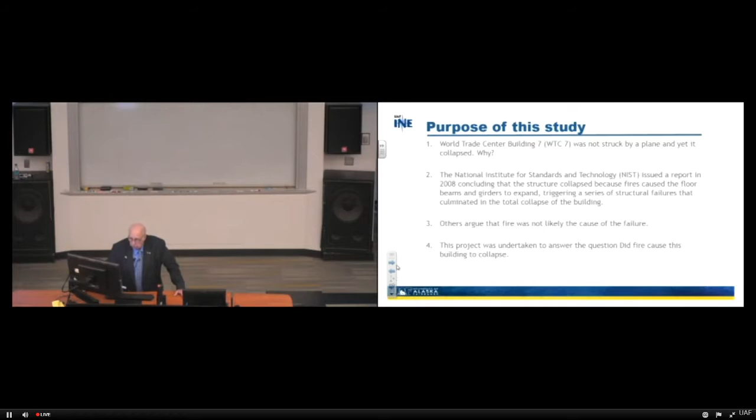Today I want to share the methodology with you. We first assembled the available documents, erection drawings, etc. that were available for this project, for this building. Traditionally, I would have liked the opportunity to go in and pick up all the pieces of the puzzle and put it back together like a typical airplane, but they did not exist, it wasn't available. So we did the best we could with all available documents, and basically created an AutoCAD drawing used to create a virtual geometry of this 47-story building. In digital form, you should be able to see every piece, every puzzle, every member, and it should look exactly like what was used in that structure. So that's what we did.

We then prepared an Abaqus nonlinear computer model for the connections and framing of this building. That's a fairly sophisticated finite element program available that enables you to look in detail at how something will respond under a set of conditions. I know I have a mixed audience here, so I'll try to keep it simple, while also sharing some pieces of complexity so those in the technical arena can appreciate that we looked at this in a fairly sophisticated way. There are several things here I haven't talked about.

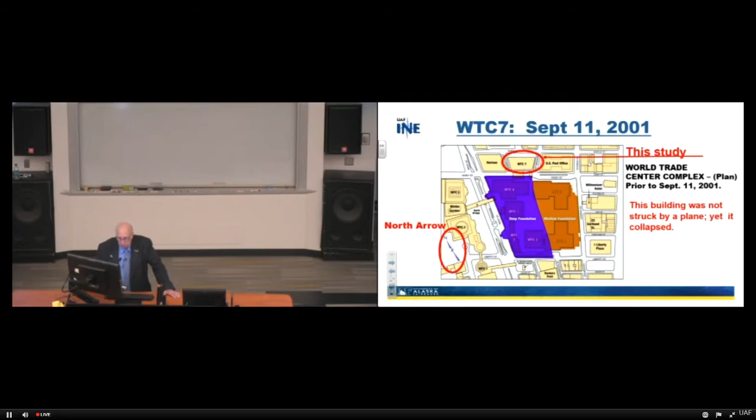If we're looking at it from an elevation view and take a look at the various sides of this building and what it may have looked like, here's the north elevation, the width. Notice it's wider trapezoidally than the south elevation. So the building is not symmetric, for God's sake, there's all kinds of issues, but this makes it really interesting. And here's that width.

Here's the south, notice it's not as wide. And then here's the west elevation and the east elevation.

Within that context, here's floor 13, because that's where we're going to spend a lot of time, so you'll have some understanding of what's going on in that area. Here are these perimeter trusses I was telling you about, at floor 5, 7, 24 and 22. Those trusses are resisting lateral loads.

In the plan view you see A, C, D and so forth, there's that building in plan view. Down below here is the Con Edison substation, shipping, and so forth, all the things going on down there. Okay, so that's what it's built on, that's what it looks like, that's what we're dealing with. Way more complex than that.

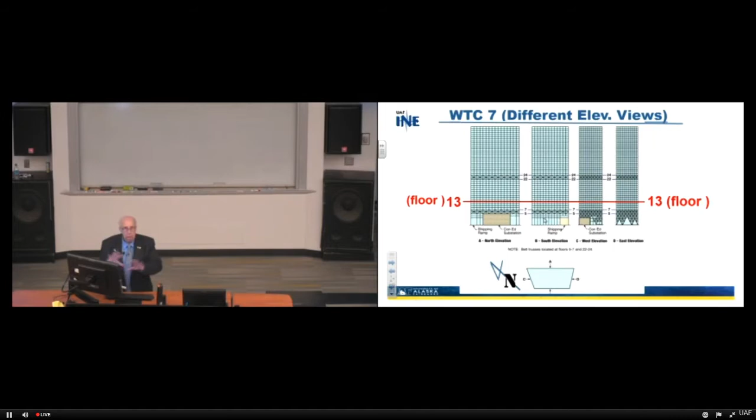Because column 79, just to give you a snapshot of where we're heading, column 79 is basically what they said failed to bring this building down. So we're going to go there and take a look at it, and we're going to look at it intensively.

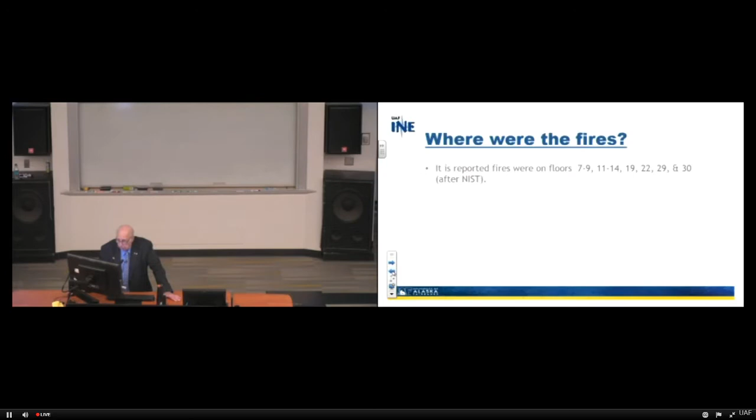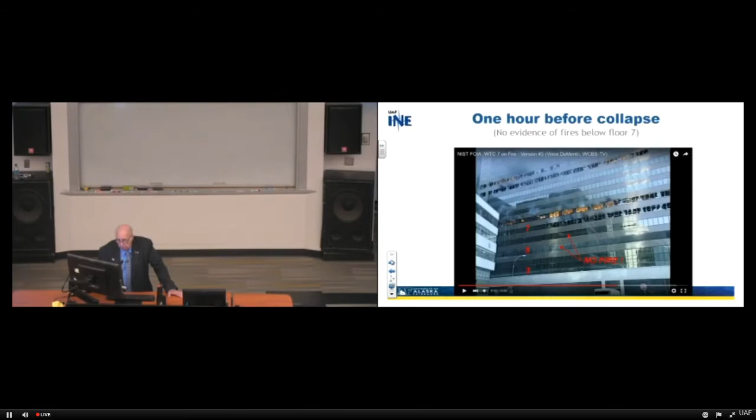All right, so now moving on with that idea in mind. We've got all that beautiful thing captured in our minds. We're ready to go. So there were no shear studs installed on the building girders.

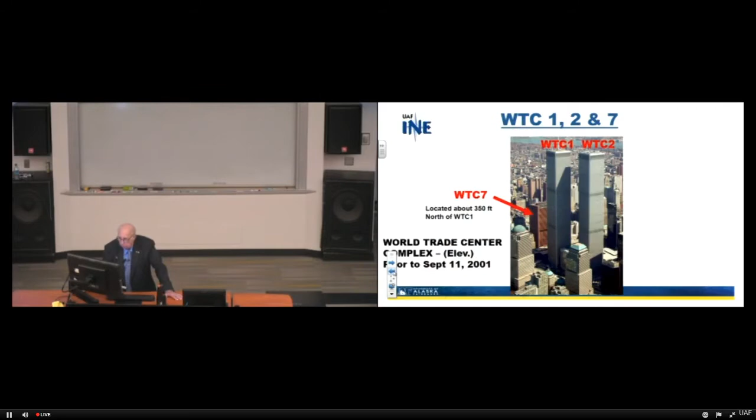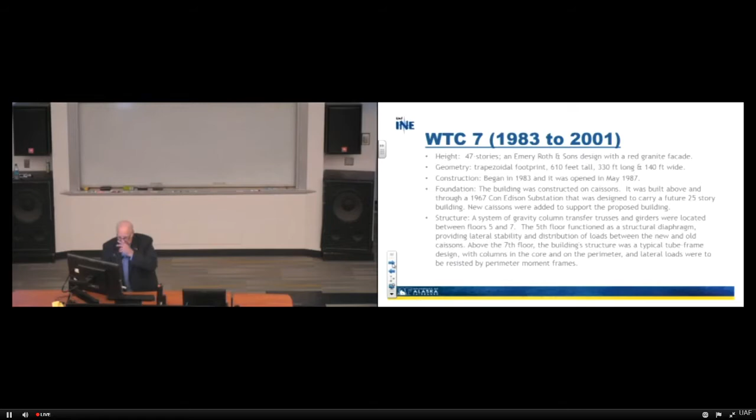Okay, so... going backwards here or something. Hang on a second, I'm going crazy. Too much fun, all right.

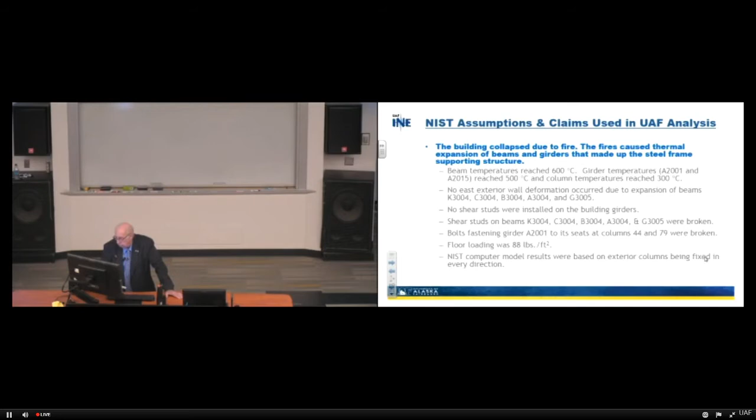So they've lost those supports. That means those two columns no longer have lateral support at that level, and did they possibly have a problem later? The floor loading was 88 pounds per square foot. The NIST computer model results were based on exterior columns being fixed in every direction. That's kind of a significant thought.

So now, looking at their plans — this came out of the NIST report on page 343, 2008 — this gives you a geometry, that's a 45-foot length from column 44 to 79. That's a girder length, 45 feet, that's longer than this for sure. You see what I'm saying? That's not small. This is a huge building, 600 feet across.

I mean, for God's sake. So here is 50-some feet here, 54 feet across. This is our exterior wall. I'm in the northeast corner of this building. Is that clear to everybody? Here we are in that trapezoid world.

Notice that there's asymmetric framing. These beams, those beams, for God's sake, are 52 feet long. That's not small. I mean, where in the world do you see that kind of stuff?

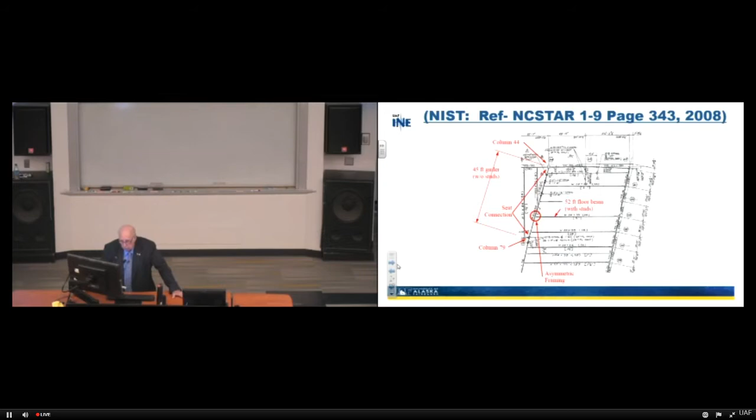So anyway, in their view, by taking a heat model, putting fire on it and then subjecting their finite element model to an increase in temperature, they got a thermal expansion. Their thermal expansion looks like this — that actually is this girder right here, A2001. It expanded, and they said it pushed off of this bearing seat, and thereby they lost support.

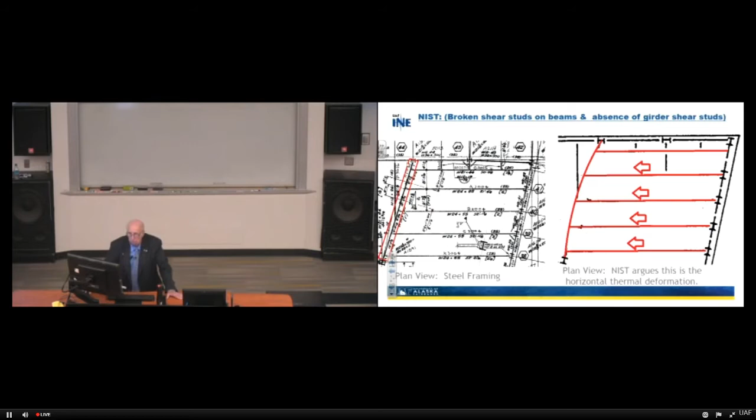And then these cascaded downward. Okay, so that's basically what we're talking about here. There's that girder I'm talking about, there's that exterior, and here are lateral supports for this beam system through here.

So what were their conclusions? First of all, their fire-induced weakening of critical columns did not cause WTC7 to collapse — didn't get hot enough. They're saying that 300 degrees is not hot enough. No argument. Temperature in column 79 was below 200 degrees C. I think that's true — I might have to look that up as a reference again, but I'm pretty sure that's about what it was.

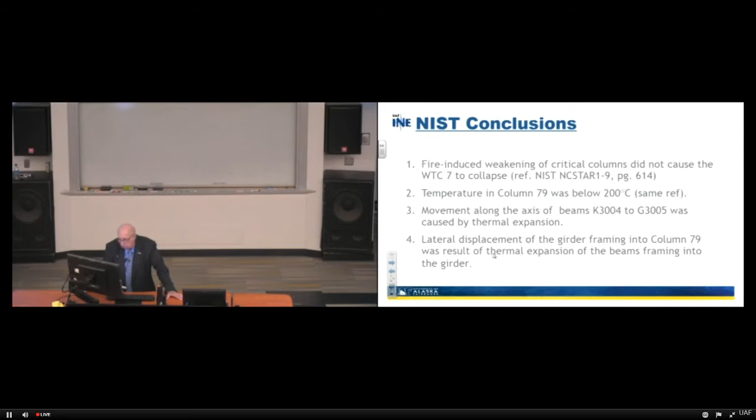Movement along the axes of beams K3004 to G3005 was caused by thermal expansion. Then the lateral displacement of the girder framing into column 79 was a result of thermal expansion of the beams framing into the girder. All we're saying here is when these heated up, they got longer. This was fixed, so they're all going to move to the left. That means they move what direction?

West. And in moving so far west, what happens? Well, they're going to try to move, and is there enough seat to hold them in place? That's what their argument is, right? That's the key right there. And that's what it looked like — bang, bang, bang, bang, right? This thing bowed outward, and so this moved and that moved.

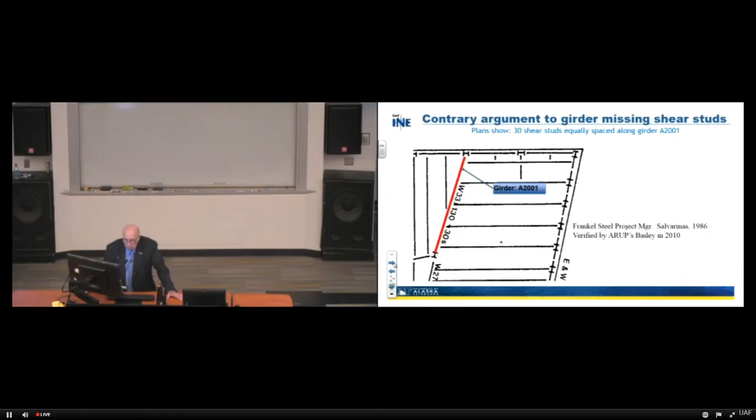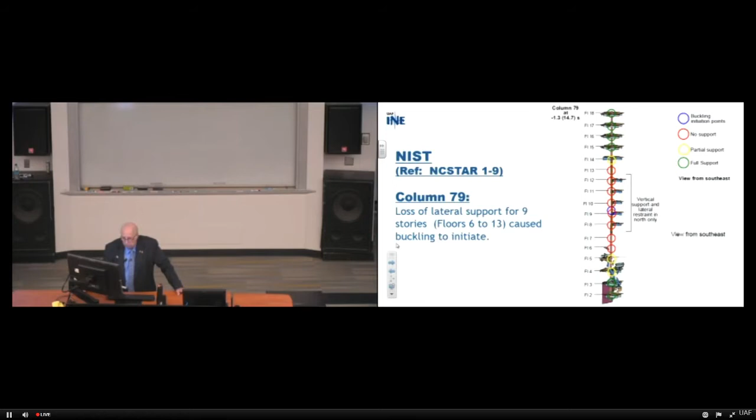Okay, now let's take a look at their model for a moment. Their model is, this is looking at a partial of that trapezoid. Down here, partial. We're seeing a partial of it. This is the northeast corner. There's column 79, and in that blue, it's kind of significant.

That blue is where they put, at every place a beam and a girder come together, a column to a girder goes together, a beam to all these kind of things. There's a connection that's on the drawings that says here's how you will build it. You bolt it together, you make it do whatever you want it to do, and that's the way it was supposed to be built. Remember that the north arrow is here.

This is the west side. The east side is to my right. And this is after NIST, the area of floor where connections were modeled on floors 8 to 14, and that's in the blue area. Over here, that wasn't done.

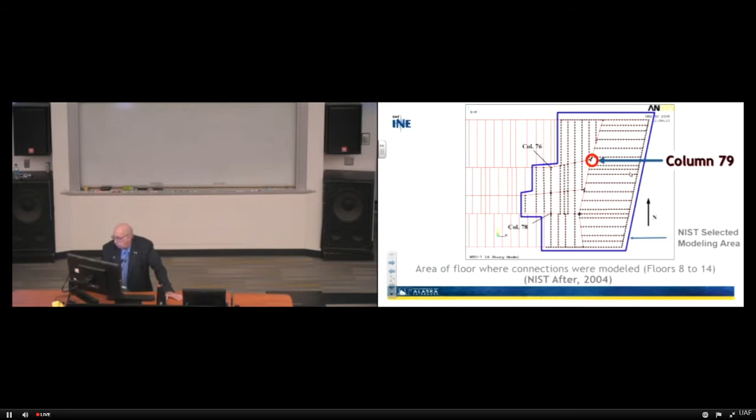So there's column 79. Here's the area outside of the thing. And so now let's take a look. Outside the selected area, connection failures were not modeled. NIST used fixed or pin connections.

So automatically, you have to ask yourself the question: do they have the same stiffness as what you were modeling here more accurately? And so the next corresponding question is, does it have an influence? Does it change how the system is going to respond?

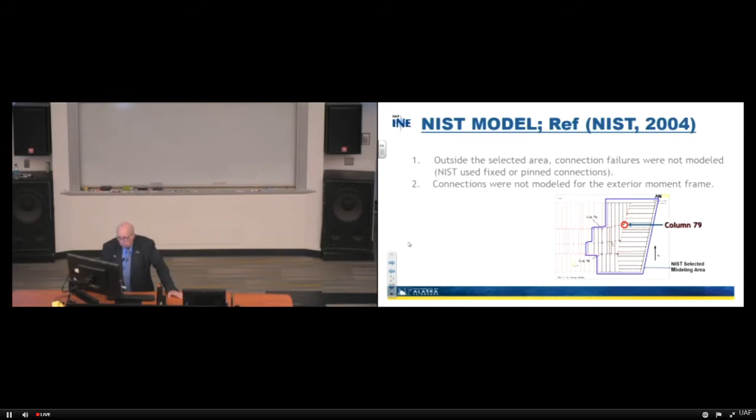And so the connections were not modeled for the exterior frame, and the columns themselves were treated as fixed.

Also in the NIST documentation, page 525, 2008, a girder was considered to have lost vertical support when its web was no longer supported by the bearing seat. That means if they lost bearing support on A2001 coming into column 79, then it's lost. The bearing seat at column 79 was 11 inches wide.

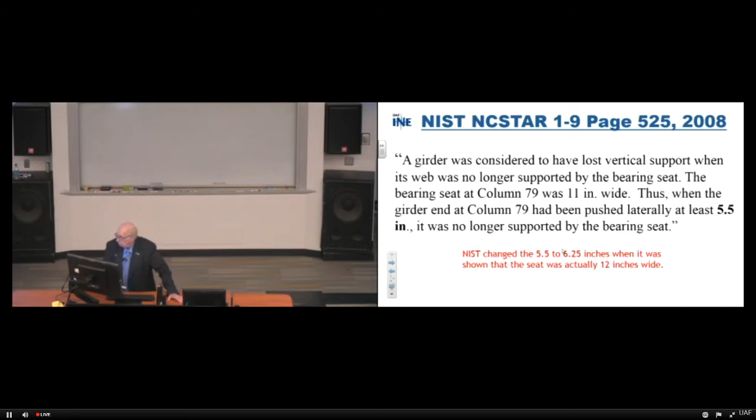Thus, when the girder end at column 79 had been pushed laterally at least 5.5 inches, the web over, it was no longer supported by that bearing seat. NIST changed that 5.5 inches to 6.25 inches when it was showing that the seat was actually 12 inches wide. So that's kind of something to think about. Why did that happen? And that was later.

So some of the NIST results are the following. Pardon me if I'm boring you, but this is a passion for me. Let's just take a look at what actually happened.

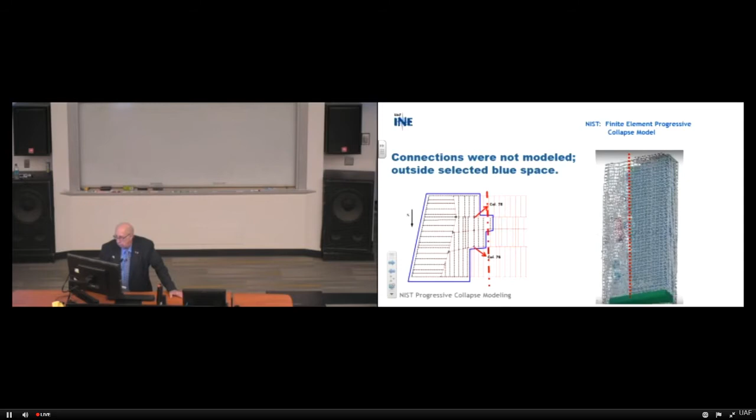Oh, I suppose we could even look at it from a different perspective. And there it is again. This is what they're doing.

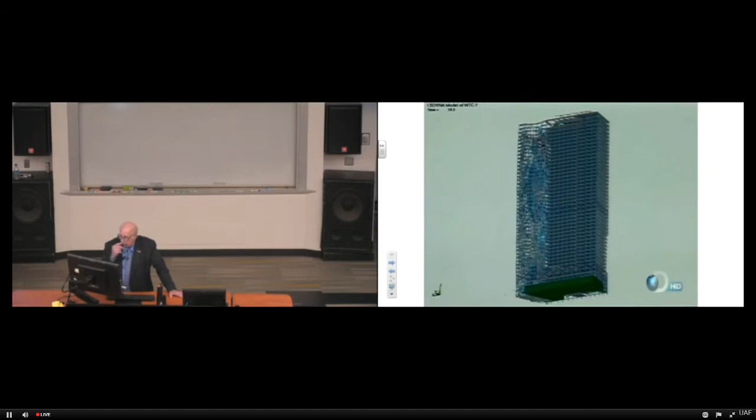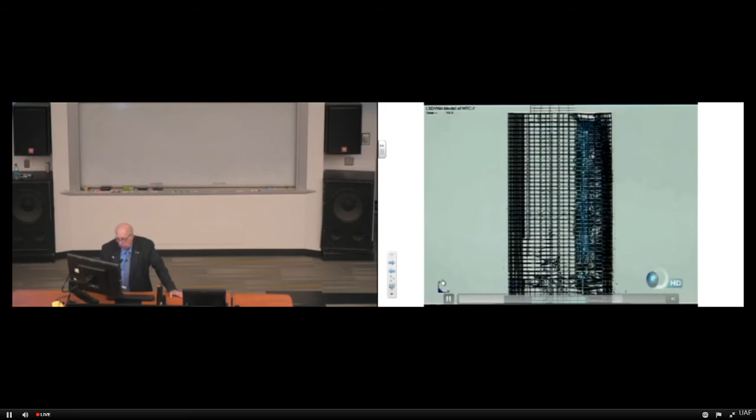You have to ask yourself the question, though, why is it so much different on one side than the other? You see what I'm saying? And here's things that they, because of some damage that came in from debris falling through the windows, they're accounting for some of that stuff.

Anyway, let's talk about UAF for a moment. Analysis of the NIST collapse initiation hypothesis and propagation claims is really what we're about to embark upon, is how valid is some of this stuff from a science point of view. So, UAF analysis of the NIST collapse initiation hypothesis and propagation.

We created a solid model in Abaqus of the structural members in the northeast corner of the 13th floor of WTC7. A finite element analysis was then performed to replicate the results claimed in the NIST WTC7 report that girder A2001 was pushed or rocked off its seats at columns 44 and 79 to initiate the collapse of the building. So one might argue that if those things didn't happen, would the building have collapsed?

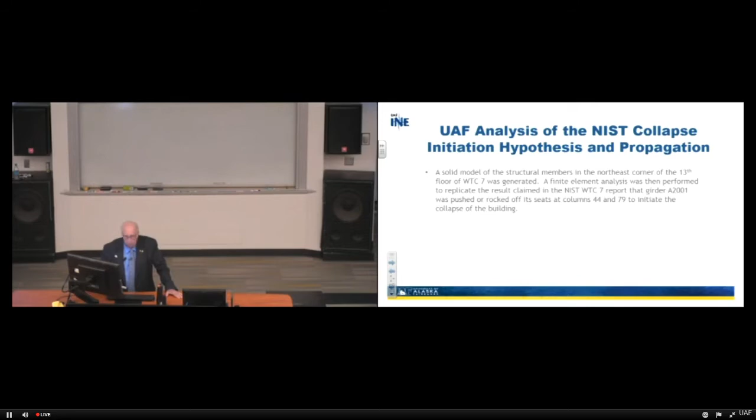So what we're going to do is create part of a finite element model, and we're going to be really conservative. We're going to force things to happen that's worse than the real world, okay? And in so doing, if we can't force failure, then it couldn't have happened. Are you with me on this point?

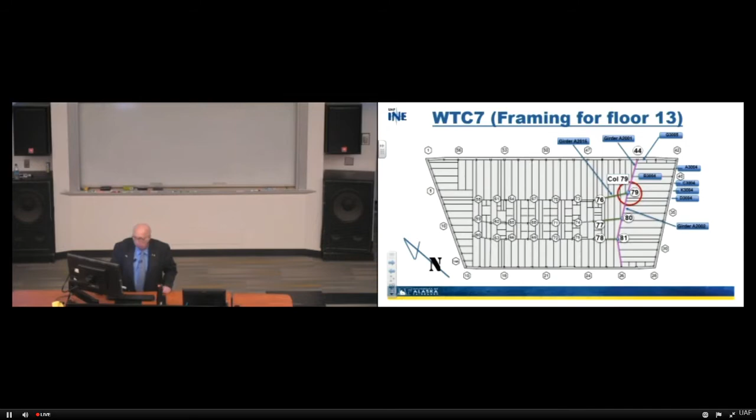All right, so that being said, we're going to fix the ends. We're going to force movement through girder A2015 by heating it up. This over here is going to be heated up. These beams are going to get heated up, and they're going to be fixed in the other direction. So we're pushing it each direction, making matters really the worst possible. And this is what that model looks like before it gets run.

So we don't have the entire floor system here. We do, by the way, have the entire floor system, but for this analysis, to evaluate what's going on right here at column 79, that girder, this condition, we're looking at what we need to do, and that is look at the boundary conditions to force that condition to be absolutely the worst possible.

Okay, we did that. And so this is the beginning. You'll notice everything's zero, the stresses are all zero. We haven't put the temperature on it yet.

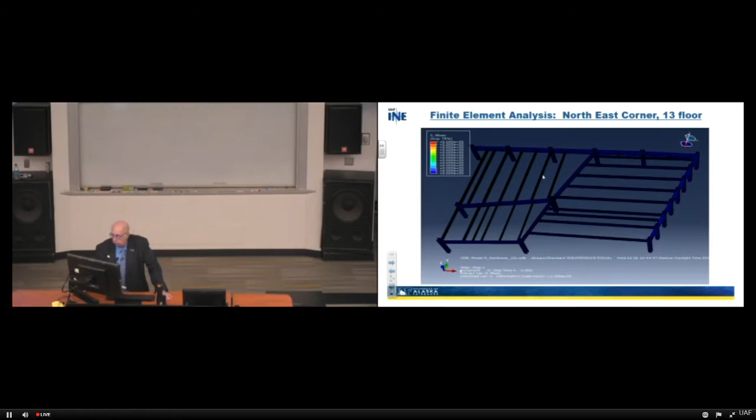Okay, this is the column that we're talking about, column 79. This is really significant, by the way, because column 79, if you look at it, do you know what I'm talking about when I say a W shape? A W shape looks like an H. And that's what we're looking at right here. That's what that column was made out of.

It's a W14 by 730 standard structural shape. What that means is it's 14 inches deep, weighs 730 pounds per lineal foot. That's a chunk of change.

Now within that context, what they did is they built side plates on it, and they closed that box. They closed it so it has structural integrity, resisting twist, significant. But those edges, those 2 inches by 26 inches buildup, means that there is a lip on each side of this, and they're going to literally put on that flange the bearing plate.

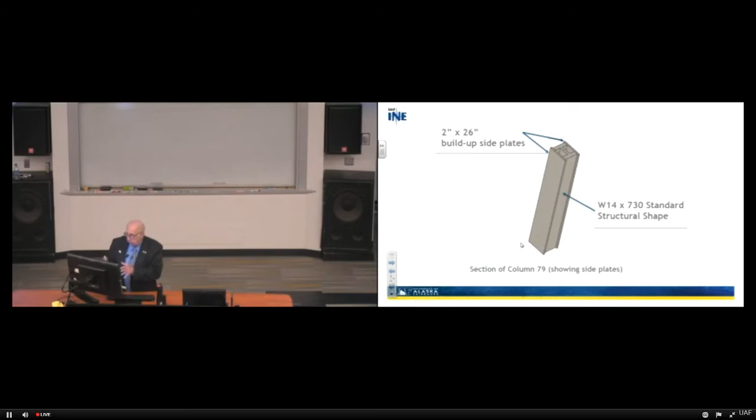Understand? So if this thing starts moving, and it's getting shoved, and if it's getting shoved to the west, which is to my left, it's probably your left too, then it can't get past that thing, unless something happens or breaks, right? Does that make sense?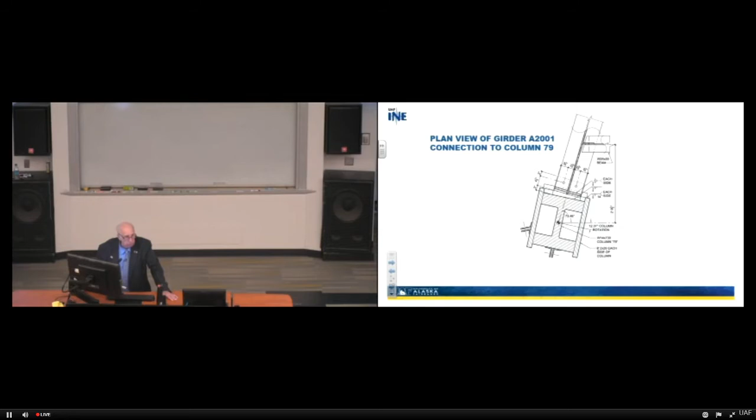And there it gets shoved. So the plan view of A2001 moving across its bearing seat at column 79 due to thermal expansion of the beams framing into the girder from the east is here, and it gets shoved. Note that picture illustrates that A2001...

A2001 is trapped by that column side plate, and it's not possible for it to move the girder web beyond the seat claimed by NIST. They're saying it got shoved off and fell down. The fact of the matter is they didn't have the side plates on it in their model, so they wouldn't have found that. But yet they did exist in the structure, in reality. It appears that NIST did not examine the side plate influence on the restriction of movement by that girder.

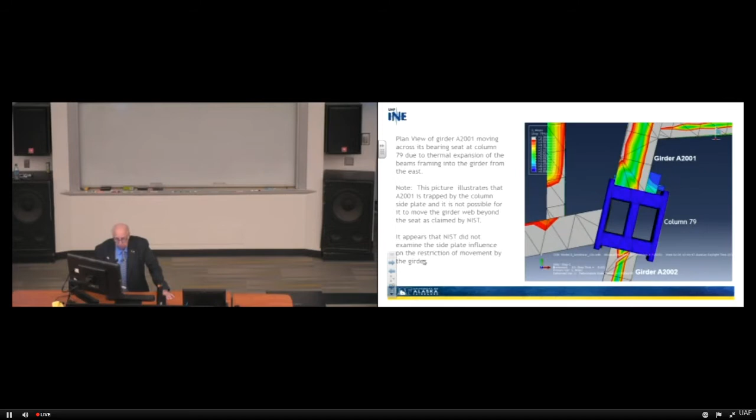Okay, so now let's take a look at what else we looked at. This is just part of the puzzle, because we've been playing this game for 2 years. So this is just a few weeks of stuff.

So the model shows the influence of thermal expansion at the northeast corner of floor 11. Here we are. There's column 79, column 44, and there's the northeast corner, and here are the beams framing into that girder system.

So when girder A2001 is trapped behind the side plate on column 79, these beams begin to buckle. In other words, they can't go in here. It's heating up, it's pushing, and they can't stand the amount of load axially that's been imposed upon them. So they begin to try to displace out of the way and relieve their states of stress. Are you following what I'm saying here?

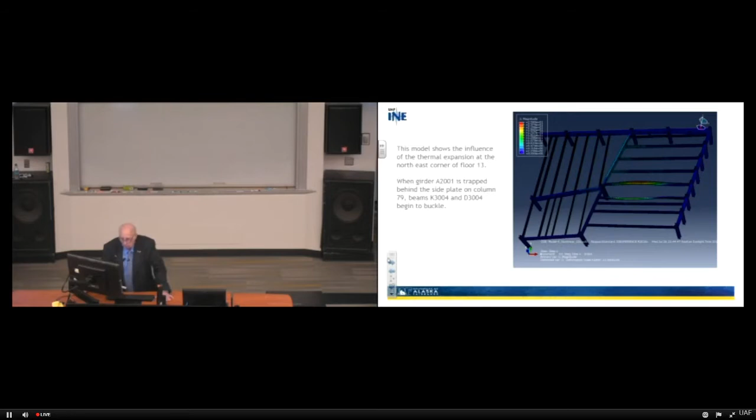So fundamentally, that happens. This is out of the NIST WTC7 report, figure 8-22, showing basically concrete slab, metal deck, all that kind of stuff. Exterior columns out here, this is basically column 79, column 44, and how that column is, and the girder here, and so forth, okay?

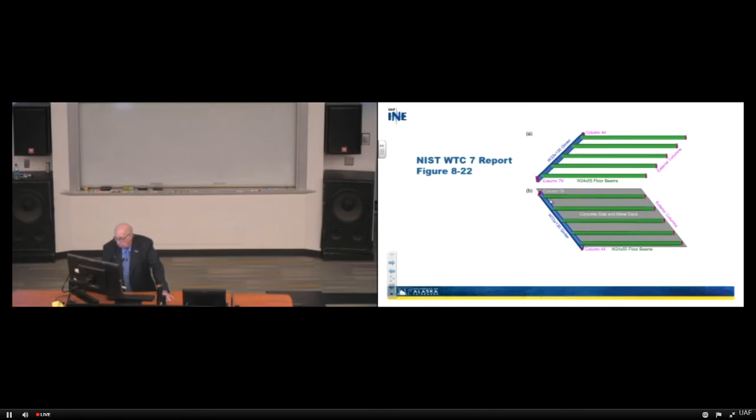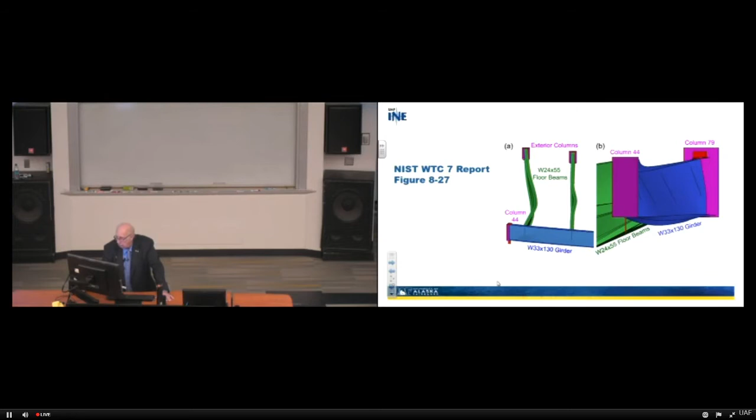And here's what begins to happen on the exterior columns according to their stuff, okay? And so they did not have those side plates in there.

So let's treat for a moment the lateral support beams, S3007, and so here we are in this area right here. See those little beams in here? They play a role, and that means that they provide lateral support for that beam, also for that exterior.

So they're forcing them to act together, not individually. So if things actually got out of hand, you have a lot more capability from a lateral torsional buckling point of view or an axial load point of view.

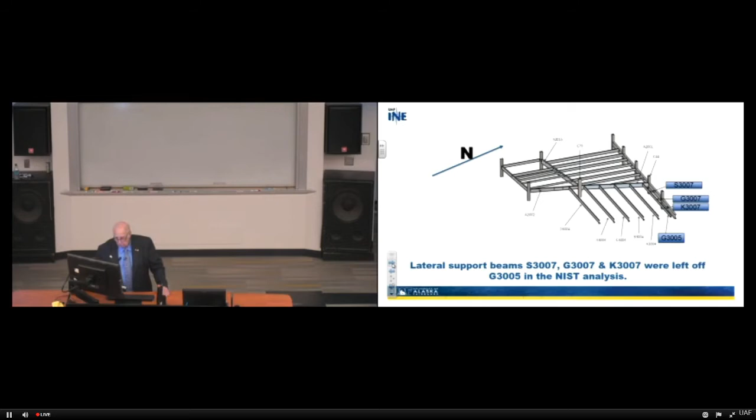And so the lateral supports on us were left off in G3005, okay, of this beam. They were left off. Those were left off. Yet they're there. So that means that something could happen, and there it is.

So UAF analysis showing beam G3005 does buckle when lateral support beams 3007 spanning to it from the north exterior wall are not installed. Okay? So if those are not installed, it's going to buckle. Okay?

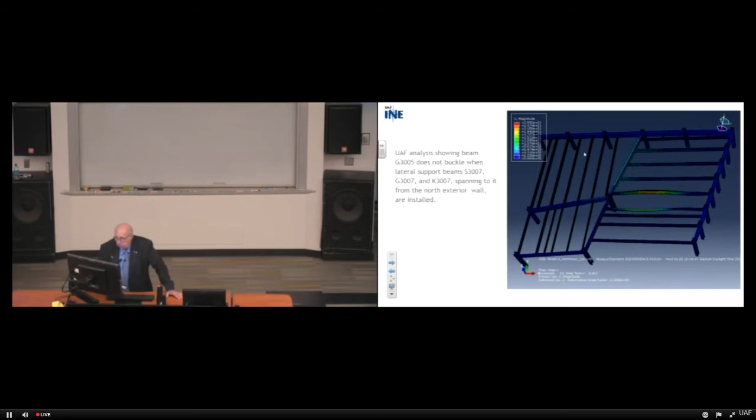So the UAF analysis also shows that girder does not buckle when you have them in. There's a huge difference between those two thoughts and what that might mean to the behavior of this system, spanning to it from the north exterior wall as we see here, okay? So is everybody getting a mental picture of this building? You should be almost getting an intimate view of what we've been living with in this picture, okay?

Let's take a moment, take a breath of air. A view of the actual configuration of girder A2001 at column 79 from the Frankel 1985 drawing 9114, showing there's partial height stiffeners in here.

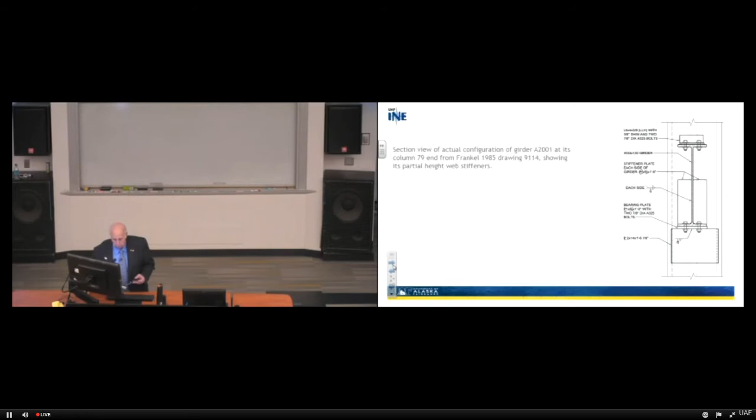Now folks, let me just absolutely tell you, this is critical. Those stiffeners prevent this web from buckling. But more than that, it prevents these flanges from getting overstressed and having a flexural problem. If they're there. If they're there. But NIST did not include them.

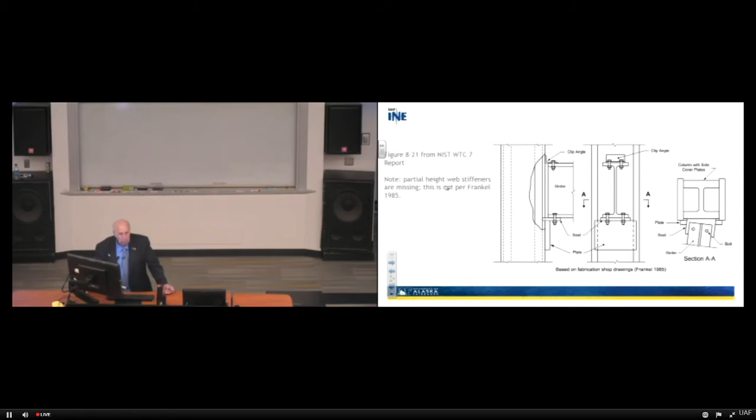So, partial height webs are missing. That means there are some issues here that we literally... it affects the behavior of this system.

So figure 8-23, finite element analysis from the NIST WTC7 report, note partial web stiffeners are missing. So the behavior of this interaction between column 79, A2001, column 44, the beams to the girder, the moving of the girder on that bearing stiffener, I mean on the base plate.

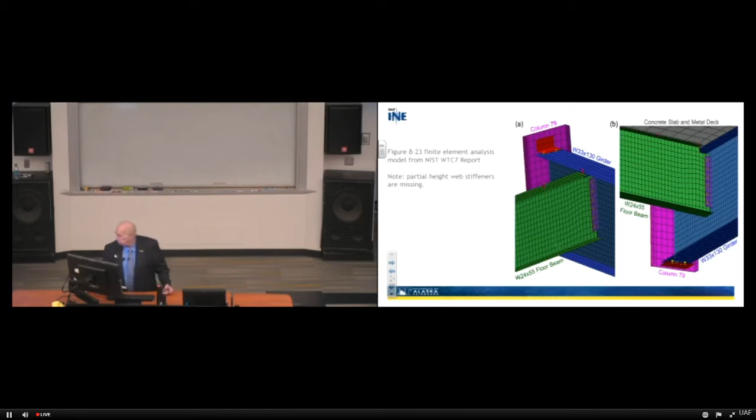Now remember, they didn't have the base, they didn't have the side plates, they didn't have the stiffeners, and all of those things are going to give you a huge added resistance to anything going on here. And in spite of that fact, I'm going to share with you some other things that make it quite interesting. So here we go.

There's what if you don't have any side plates. So the analysis was performed forcing girder A2001 beyond its bearing seat by removing the column side plate, increasing the coefficient of thermal expansion of the beams framing into it by 40%, so we could get that kind of movement. That's not true — we did it just to see what could happen.

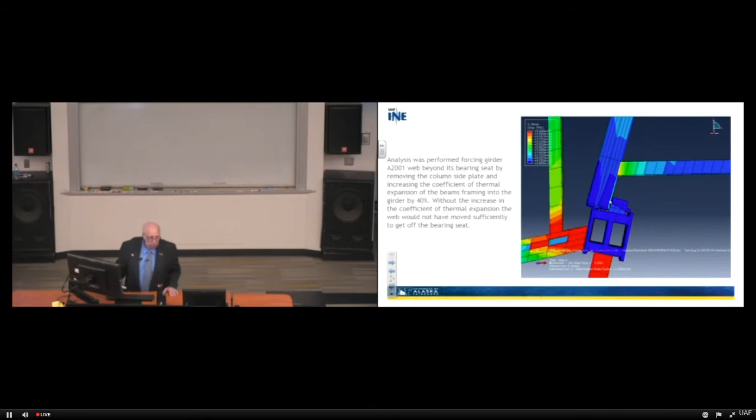Without the increase in the coefficient of thermal expansion, the web would not have moved sufficiently to get it off the bearing seat. We wanted to see if we could make it move. Okay? That's what we did, that's at column 79, that's A2001. Is that clear? Everybody got a mental picture of what's happening?

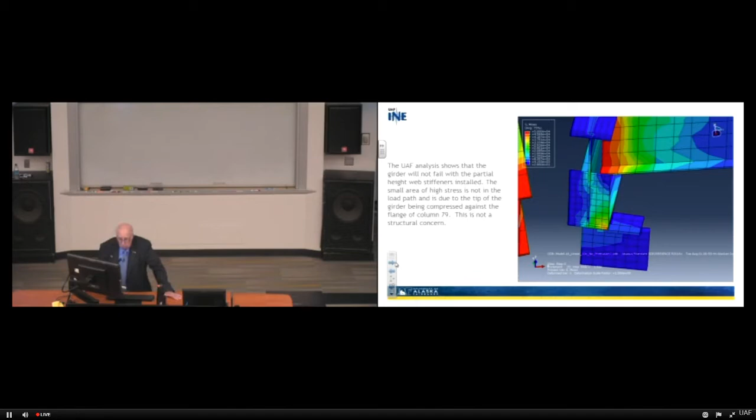Well, again, the UAF analysis shows that the girder will not fail with partial height web stiffeners installed. That small area of high stress, right here, is not in the load path. That's a point of high stress, by the way, and it's not in the load path. It's due to the tip of the girder being compressed against the flange of column 79. This is not a structural concern. It's a fact that there was some overstress there, but it's not going to cause the building to come down.

So we also conducted a modal analysis showing the 52 Hertz frequency mode of the falling beam and girder assembly, which was needed to calculate the combined stiffness of the contacting structural members and the subsequent impact load on the girder below the 12th floor. So here we are on the 13th. It drops off of that base plate, drops down, beams go, girders go, concrete goes, all that stuff happens. You're going to have stiffness involved. You're going to have F equals MA involved. You're going to have those conditions, and so we looked at that.

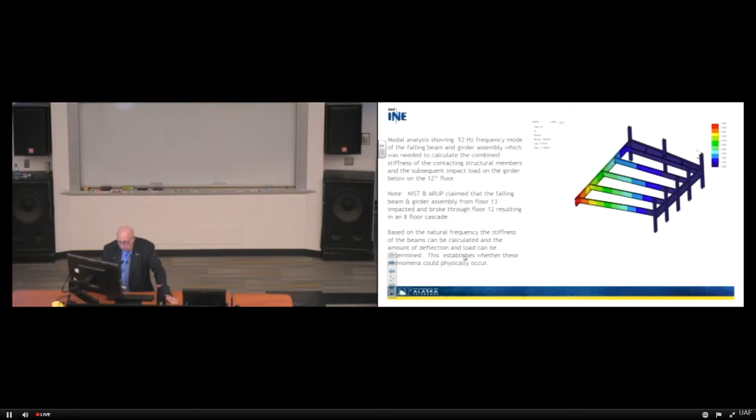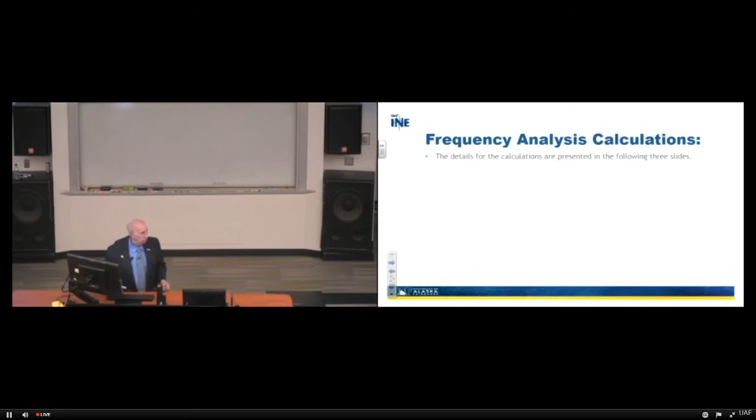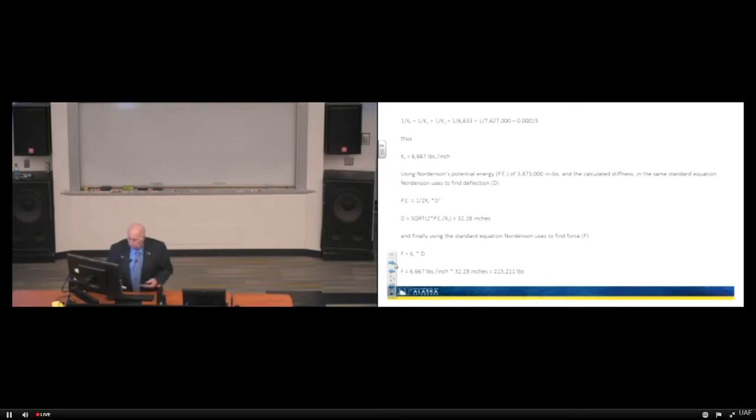The NIST and ARUP claimed that the falling beam and girder assembly from floor 13 impacted and broke through floor 12 in an 8-floor cascade. Based on the natural frequency, the stiffness of the beams can be calculated and the amount of deflection and load can be determined. This establishes whether the phenomena could actually physically occur. I'm not going to spend any time on it, but those calculations are in the following pages. So we did that to examine that issue. You can read these at night while you're relaxing, but I'm not going to read them for you.

So anyway, we had this 215,211 pound impact force, which is only 34% of the 632,000 force required, and thus insufficient to shear the girder bearing seat welds. The southeast corner, floor 12, would not have collapsed if a girder at floor 13 came off its seat. That's basically what we're saying. Thus, the ARUP analysis did not show a basis for propagation, even if the girder were to fall off its seat at column 79. These findings illustrate that the ARUP's explanation is actually invalid.

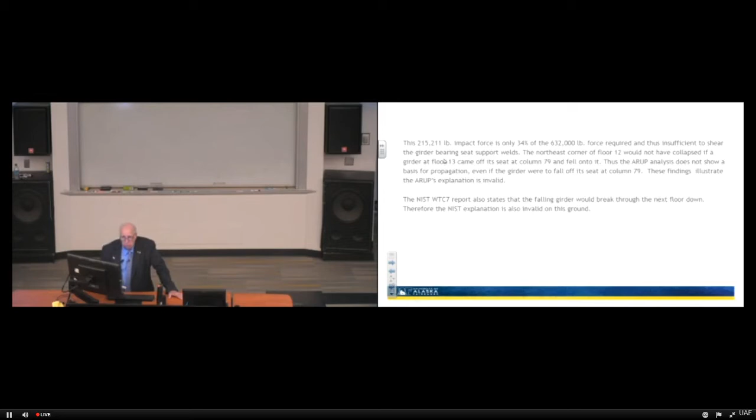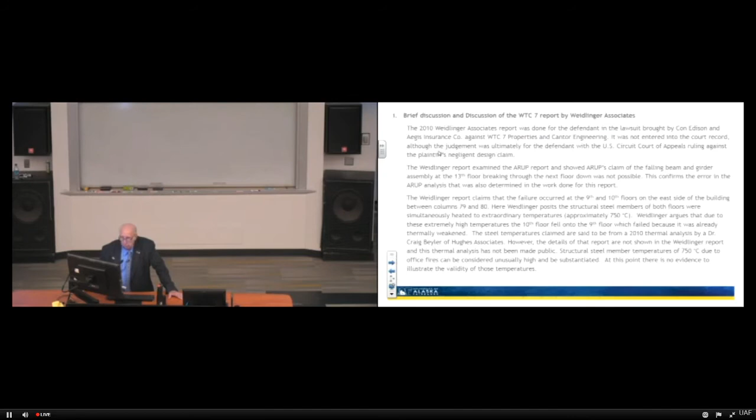That's another group, by the way, so there's more than one group involved. Weidlinger Associates' report information is going to be presented a little following this, and here that is, if you want to read it. I originally had a change to this, and it looks like that change didn't get made, but I broke this out. So anyway, let's talk now about our approach, which is looking at things from a different perspective.

There was a 5.5-inch movement at the girder bearing support at column 79 according to the NIST. The issue that led to that 5.5-inch movement was non-composite action at the main girders. Now, what do I mean by that? So you have concrete floor slabs, and you have to decide how you're going to build it. Are you going to build it with shear connectors to the flanges and make it act as a system, or are you going to leave them so that they can slide? So I looked at it both ways.

I looked at it and said, okay, what if it slides? What if it's so lubricated between those flanges and that concrete that there's no resistance to movement? What if there's friction between it? We looked at that. What if it's partially composite? What if it's totally composite? We also neglected thermal expansion of the concrete slab, separated the connection modeling, and looked at missing web flange stiffeners. So all those issues were going on there.

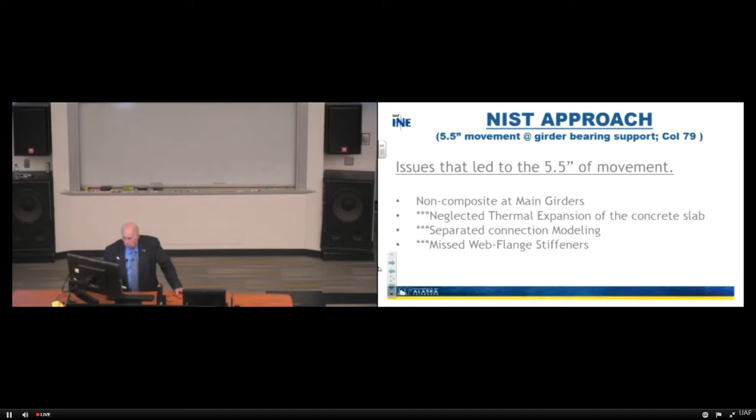So our approach was to say, okay, let's take structural modeling and look at two programs, Abaqus and SAP2000. We had established a quality control program by which we had two researchers, Zhili and Feng, each one doing the same thing much of the time and challenging each other, with me there as a referee. If we didn't agree, we had dialogue and tried to find what was wrong, until scientifically we were able to justify every step of the way.

Takes longer, but it's valuable to make sure you have good results.

So in Abaqus, we developed nonlinear springs for structural connections. What does that mean? If you have members bolted together and things move fairly significantly, then it's probably not a linear curve, not a straight line. It's probably going to deform non-linearly, and it may never come back the way it used to be. So we looked at a nonlinear response.

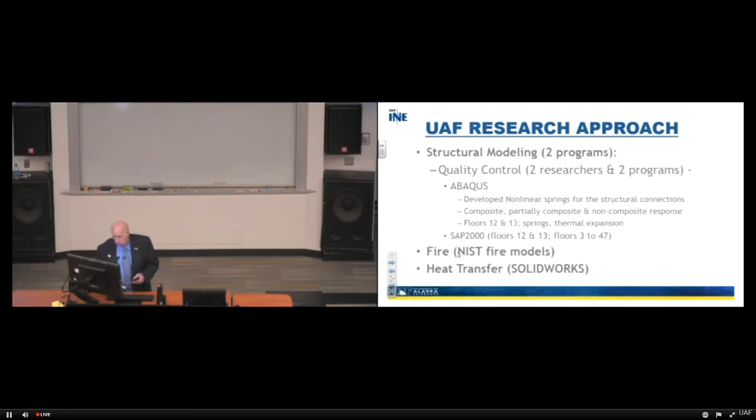We looked at composite, partial composite, and non-composite conditions. We looked at floors 12 and 13, and we looked at thermal expansion. In SAP2000, we looked at floors 12 and 13 again, and floors 3 to 47. Here's what we did do though: we used the NIST fire models to look at this, and then we looked at heat transfer using SolidWorks, and we also used Abaqus to do that.

The steel framing, connection columns, beams, and girders were considered throughout the entire floor, not just part of it, all of it. So nonlinear springs on all stories is something we haven't finished yet, but we've looked at.

Substructuring frames and concrete floor were used to minimize computer time. Some of these computer models were taking weeks to run. I went to a substructuring system where we could run them in less than an hour, maybe half an hour, maybe even less. They ran really fast because I took out all the complexities and replaced them with equivalences. And if we wanted to know what was going on within those equivalences, we put that stuff back in. So we could save huge amounts of computer time.

Heat transfer was studied, and we looked at the floor tile over the concrete with welded wire fabric, stay-in-place forms, and flutes. These were stay-in-place forms, by the way, and there's a flute. What does that mean? It means there's a steel...

I guess I don't know how to share that with you. Imagine if you take just a straight line and you drop it—I guess a little square hole, you would say, and it's long. So that space is a place where they don't put any concrete. It's an open space. Saves concrete, you still get strength, and that's a flute.

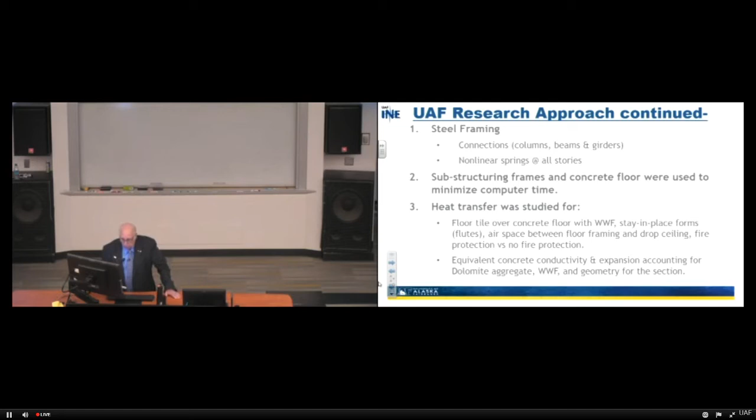It's 75% of the product, so we needed to know what it was going to be. I had written a paper on this subject some years before and had a pretty good understanding of that.

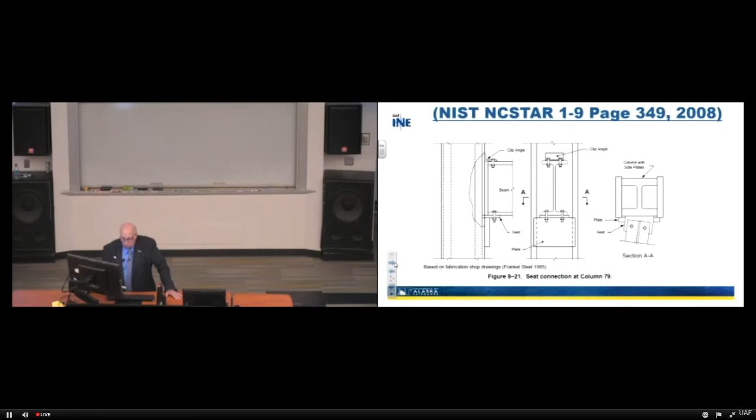So this again is the NIST seat connection at column 79 that they did, but they didn't consider those stiffeners. Here's the way we begin to model the actual system, the way it went together.

Here are those side plates—notice that they're there. Here's the girder coming in, and there are the partial height stiffeners. They actually were there, and we began to model this from a computer program to digital, so we knew how this thing was going to behave when you put it together.

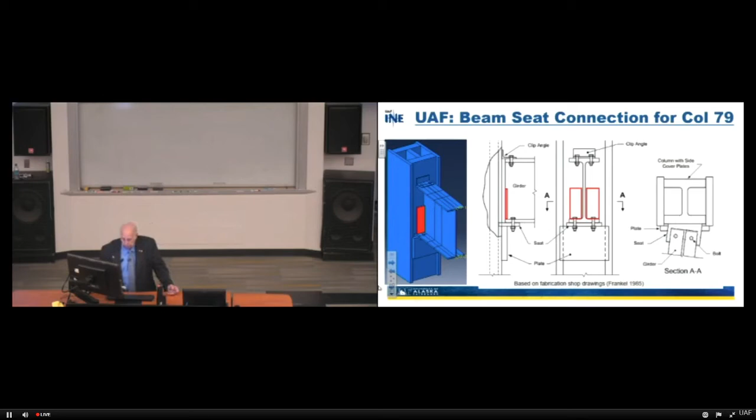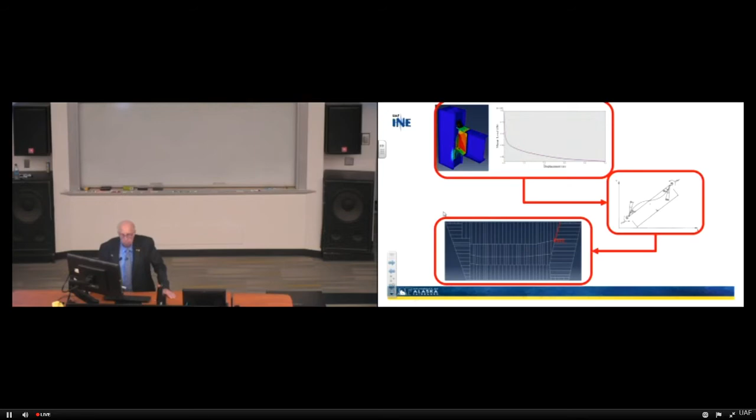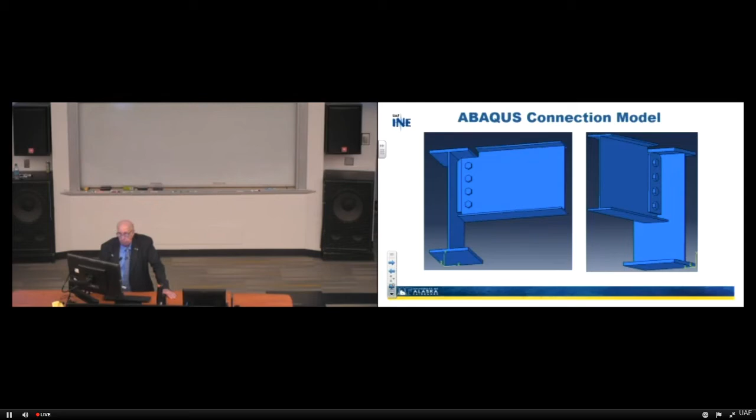So we threw that away and replaced it with an equivalent to save time. Then we looked at the fin connection, same idea. That's how it was put together, and that's how it's actually put together mathematically. That's what it starts looking like as a behavioral system. We plotted a curve for it and got a spring system out of it. We put a load, plot its behavior, and from that we can put the equivalent into it. So this is a simple model of floors 3 to 47 from SAP 2000, and that's what we're using to look at progressive collapses.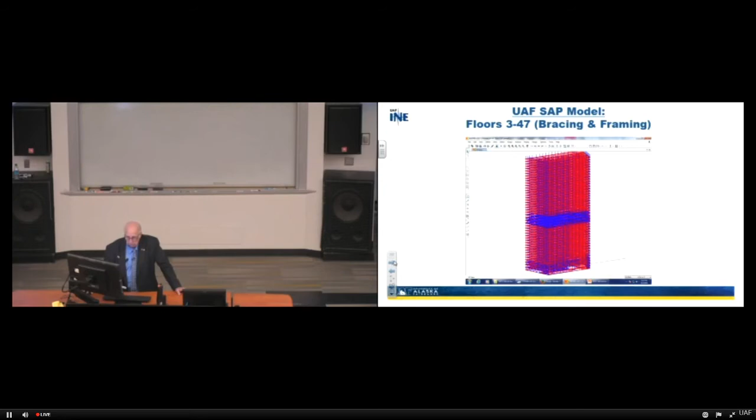Let's take a quick look at the materials that went into this. Steel ASTM 572 had a yield of 50,000 psi. Thermal conductivity of the steel was 35 BTUs per hour per foot per degree Fahrenheit. Here's the thermal strain value. Density was about 490 pounds per cubic foot.

We also had some ASTM 36 steels in here, though I'm not showing all of it. Concrete's 28-day compressive strength was 3,500 psi, density about 145 pounds per cubic foot, with dolomite aggregate. We got a thermal conductivity from it, an equivalent conductivity we're using, and thermal expansion.

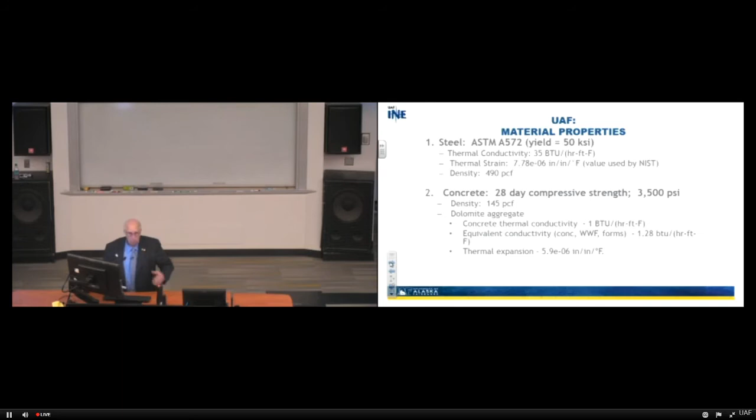That's the kind of stuff that made up the model to simulate what we thought the building was going to be. We took and fixed the exterior column wall line here, as did NIST, and subjected it to that heat-up model, and we got a very similar result.

Well, we didn't actually—I'm sorry, I apologize, this is not the NIST model. This is our model. Here we have the connections as they truly are, all along this system, throughout this entire floor system, how it actually was built.

Then we heat it up. By heating it up, we have a dead load here of about 5,142 kips. We have a movement of that section of almost 2 inches, but not west—it went east. Totally different. The floor moved east at column 79, not west. And by the way, they moved together, not separately.

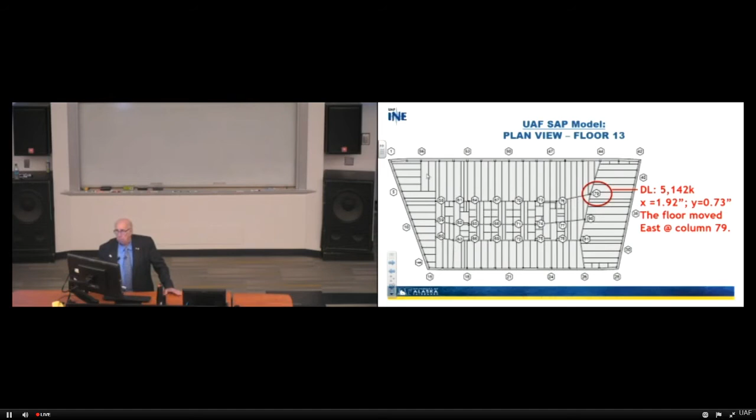So here's the material response versus temperature. Here's the column 79 capacity curve as a function of temperature. You can see even if you drop down into here, you don't get much change—column 79 at 392 degrees Fahrenheit. This is load capacity versus effective length for these various temperatures. Here's 1,832 degrees Fahrenheit. I think you can see it can make a huge difference in the capacity of that member.

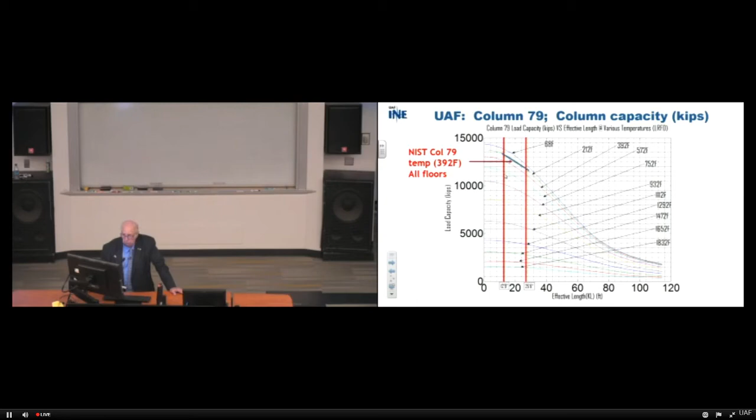Let's talk about the fires we actually put in this building. Here's what they were on floor 12—that whole area at 6 p.m.—and then there's the fire. That came from the NIST models, and we used them at this point. Same here on column 79, floor 12 and 13.

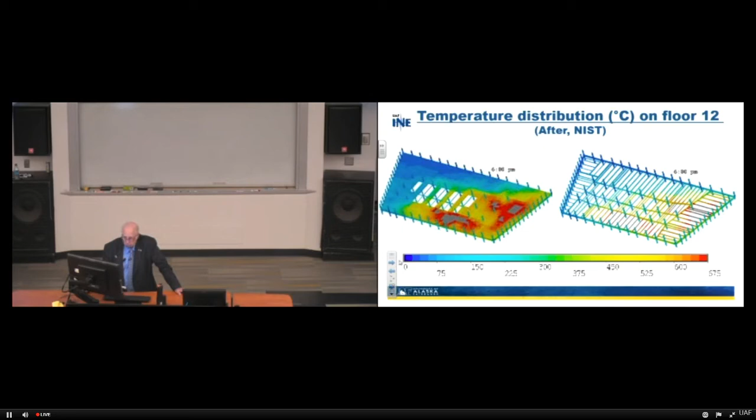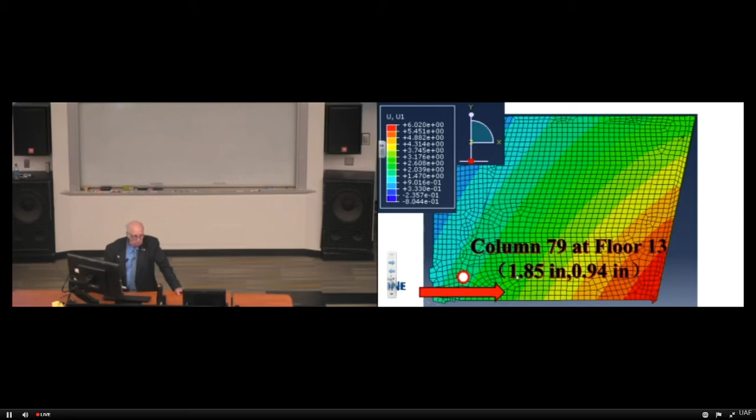UAF Abaqus structural expansive movements—just want to share this with you. This is the model we're talking about, this is floor 13. This is column 79 at floor 13, 1.85 inches to the right. That means east, not west. So this whole thing moved.

I'll show you a different picture here in a moment. So this is all the stuff to the east of this. You can begin to see the displacements—if you start looking at minus 0.50, where's the zero at? It's over here somewhere. So here's column 79, moving with respect to this area, not moving with respect to this, not moving with respect to that. It's moving this way and that way with respect to what we call the thermal centroid, which is your stiffer point. So basically you've got a center of stiffness by which this thing is behaving, and that's what's happening here.

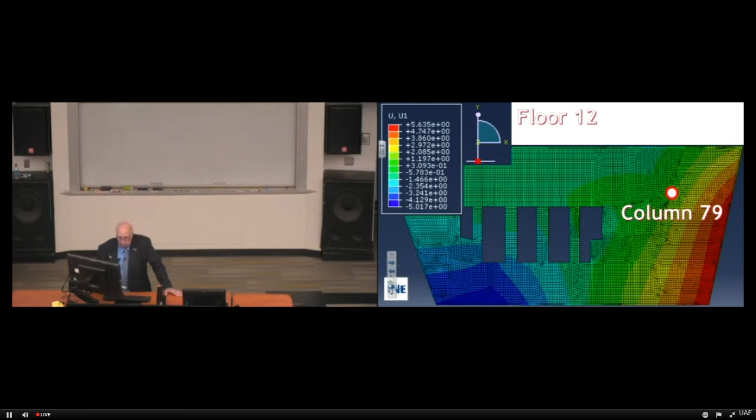Notice that our results in the SAP model show column 79 at 1.92 inches to the right, and in Abaqus, 1.85 inches. We did it two different ways and got very close to the same answers. NIST shows 5.5 inches to the left, revised to 6.2 inches. And why? Because of some of the things I was telling you—understand, in my view.

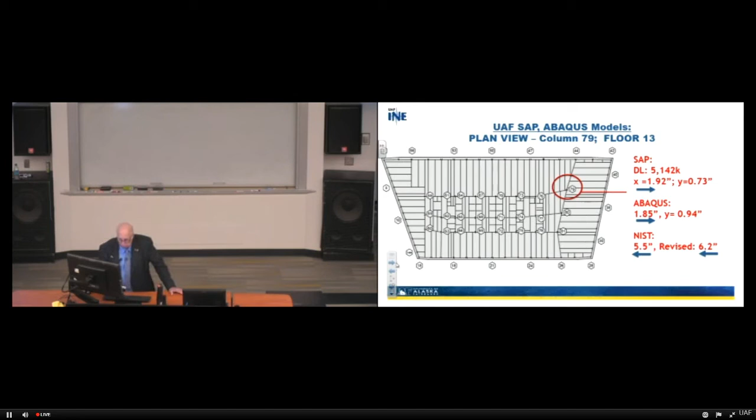So let's do a little comparative game. Floor framing, steel connections. UAF accounted for them, NIST partially.

We have exterior steel framing connections included springs. They did not. I'm talking about the exterior walls. They have them fixed, remember?

Floor is composite with beams and girders. Girder to column stiffener plates at column 79. What about the floor composite with beams and not girders? Both of us considered that. Composite with beams and girders. Yes, but they did not.

Thermal expansion of the concrete deck. Yes, but they did not. Thermal conductivity and expansion of material properties. So what I did is I went back and got the aggregate, then I changed it. I made sure that we knew what the thermal conductivity of the concrete would be and the thermal expansion of that material if they actually made the concrete matched to the aggregate type. And so we accounted for that, they did not.

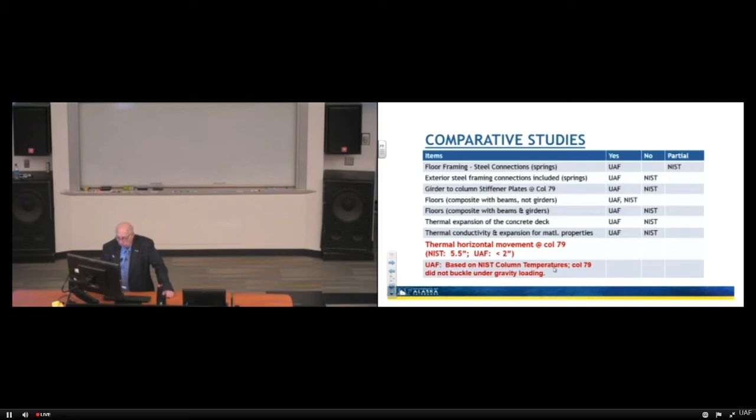Thermal horizontal movement at column 79 was less than 2 inches. Therefore, based on our analysis, column 79 temperatures were such that it did not buckle under gravity loading. Couldn't have happened. So did the building 7 collapse from fires? No, this is based on our calcs. This contradicts the findings by the National Institute of Standards and Technology, the NIST approach.

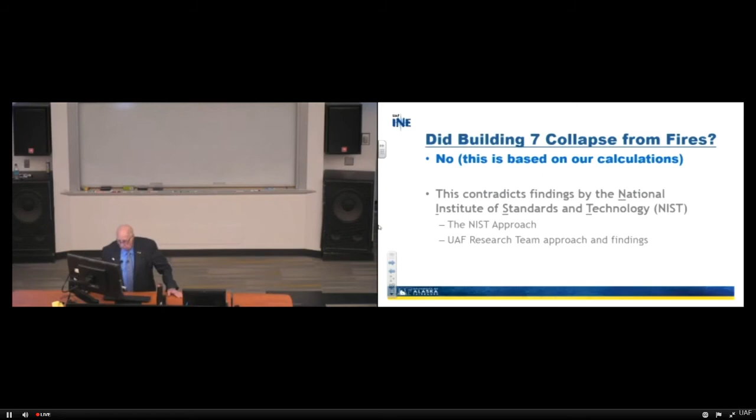So that was what I view to be the real way it actually behaved, not what you assume, not what you do in terms of boundary conditions, making things perhaps easier for yourself or whatever.

So the concrete floor diaphragm stiffness is significant, even with no shear connectors. Frictional resistance to thermal expansion is not trivial. We noticed that if you take those shear connectors out, that they argue that they're not there - take them out, I don't care. When they go away, I have enough friction and enough shear connectors on the beams that it doesn't matter. It's not going to make a difference. So that's what we determined, and we looked at it both ways.

The thermal expansion of the concrete deck cannot be ignored, and it's likely less than the steel. The value is highly dependent on the type of aggregate. My research shows that you can have thermal expansion of concrete as low as 2, all the way to 12, whereas steel is about 6.5 - depending on the aggregate. We had dolomite aggregate, and so we matched to whatever we had there.

The research team evaluated fire by considering airspace below the beams, in the space between the drop ceiling and the structural steel framing. We did that because a number of people felt like it was important. The result is that the fire underneath will likely burn through the drop ceiling quickly, as resistance to heat transfer is likely not available to help.

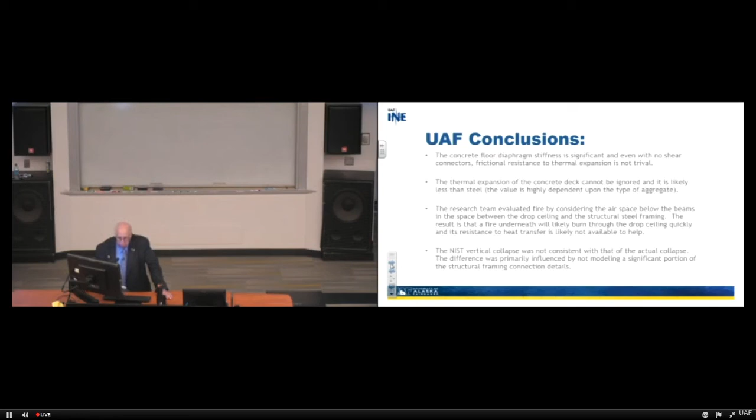I don't want that. That's not part of the game. So the NIST vertical collapse was not consistent with that of the actual. The difference was primarily influenced by not modeling a significant portion of the structural framing connection details. There may be other issues, but certainly that had an effect. There's no doubt about that.

What's new? What's next? Well, we welcome your input. We welcome input from the world. We would want to be able to try to make sure that what our findings are based on scientific fact, and if there's a question, we're there to try to answer that and to make sure that our results are true and of value. We're providing the study to be peer reviewed.

We are examining progressive collapse caused by various conditions, such as failure at the substation level, shock waves imposed by the falling debris from towers 1 and 2. What about the radiant heat that actually was imposed on the building structure by towers 1 and 2 when they heated up under the planes?

I'm interested in examining the building response for various columns being removed. We've already removed the inner core. I'm not sharing that with you, but it's very impressive what's going on. So then the question is what else is going on?

And we're examining issues related to the perimeter trusses. There's been a lot of questions about what if they had a problem? What would that mean to this structure?

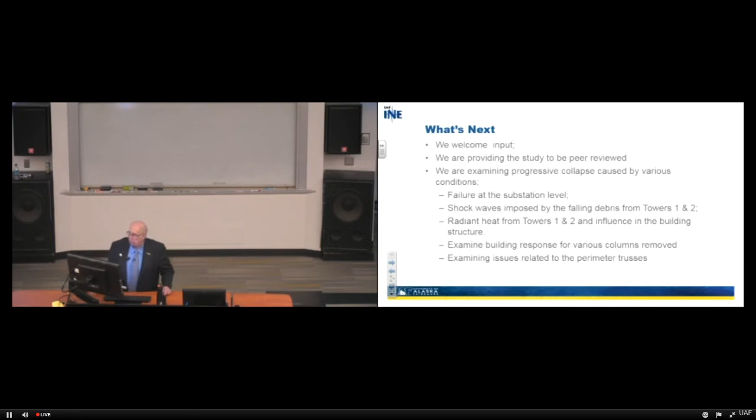I think, folks, that I'm done. Thank you.